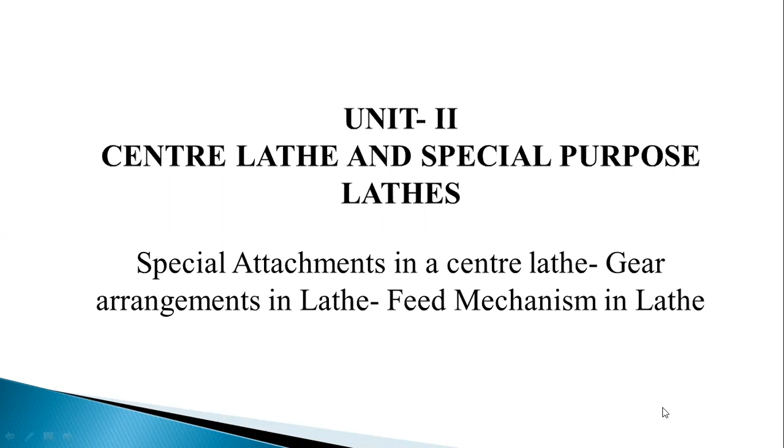Unit 2, Center Lathe and Special Purpose Lathes. From this Unit 2, we are going to see about the topics special attachments in a center lathe, gear arrangements in lathe, and feed mechanism in lathe. We are going to see about these three topics.

The course outcome of the unit is to interpret the construction and working principle of turning machine. From this unit, the students can able to explain the construction and working principles of turning machine, and understand the principles and constructions of the different types of turning machines, etc.

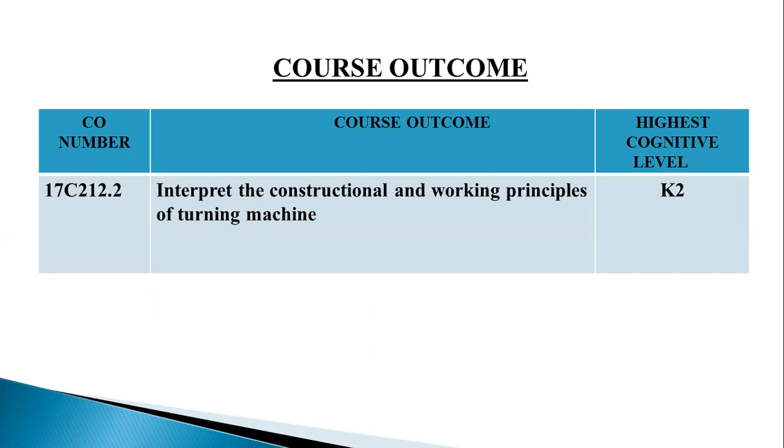Special attachments in center lathe. Each general purpose conventional machine tool is designed and used for a set of specific machining work on jobs of a limited range of shape and size. But often some unusual work also needs to be done in a specific machine tool. Example: milling in lathe, tapping in drilling machine, gear teeth cutting in shaping machines, etc. Under such conditions, special devices or systems are additionally used, being mounted in ordinary machine tools.

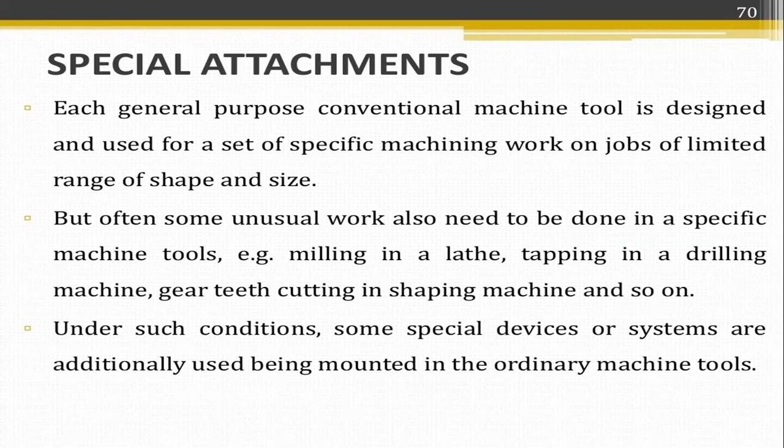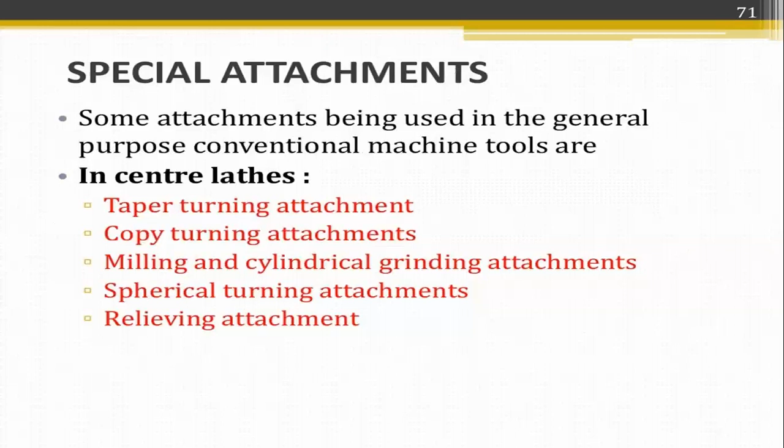Special attachments being used in general purpose conventional machine tools, in center lathe, we are using these 5 types. First one is taper turning attachment. Second one is copy turning attachment. Third one is milling and cylindrical grinding attachment. Fourth one is spherical turning attachment. And the fifth one is relieving attachment.

Taper turning attachment. It consists of guide bar, guide block, bracket for the adjustment of the head and the lathe bed, etc. Here is a taper turning process. In this area, we will be having the attachment. The tool is fixed, and the workpiece will be cut in a taper turning position.

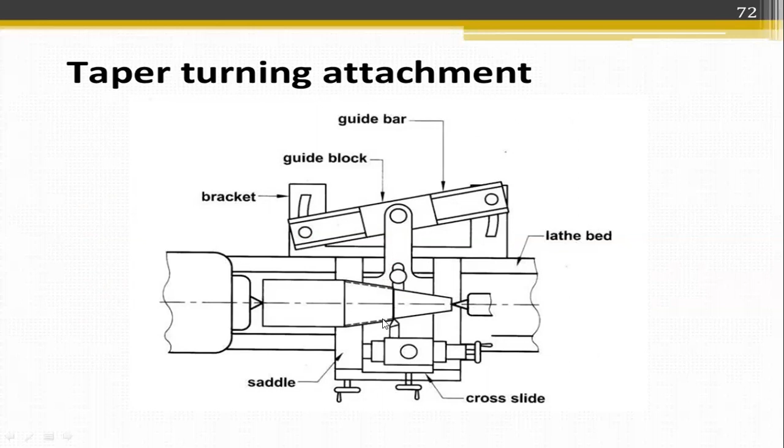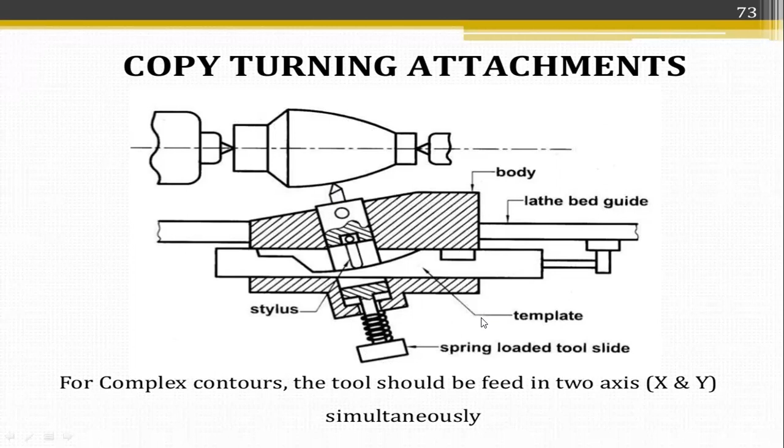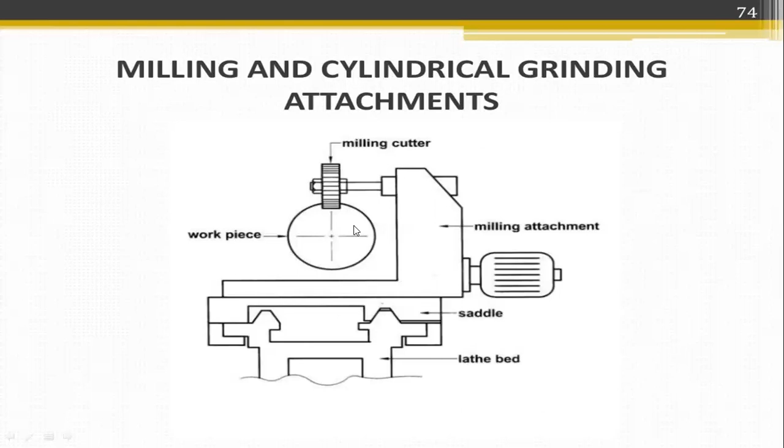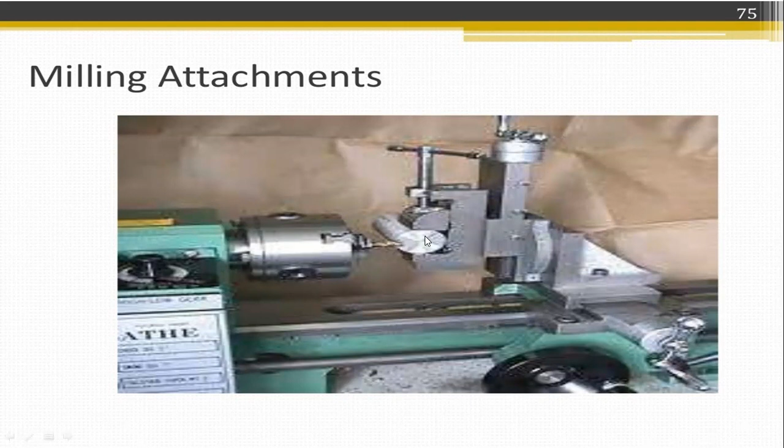Milling and cylindrical grinding attachments. In a lathe, if we need a milling operation, we will be fixing a milling cutter on the head, and we will be having the workpiece here to be cut, and the operation will be finished.

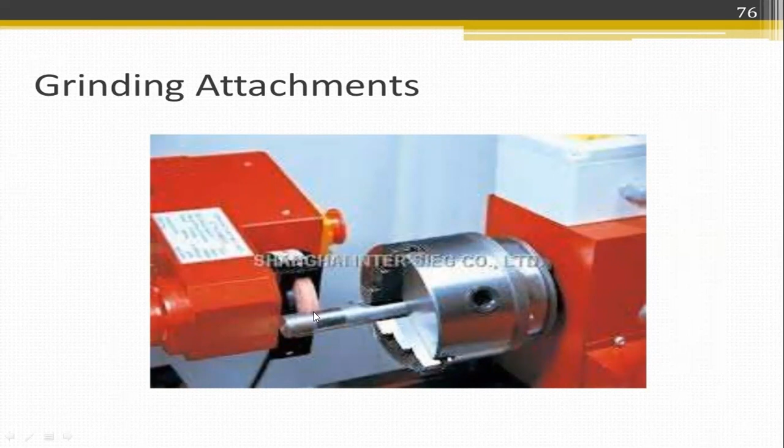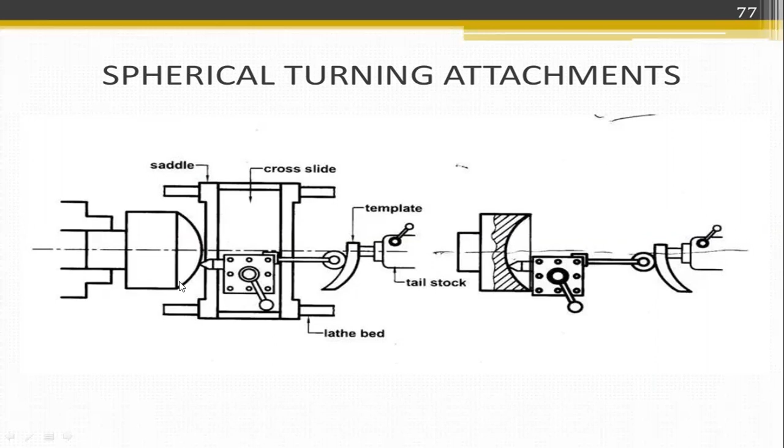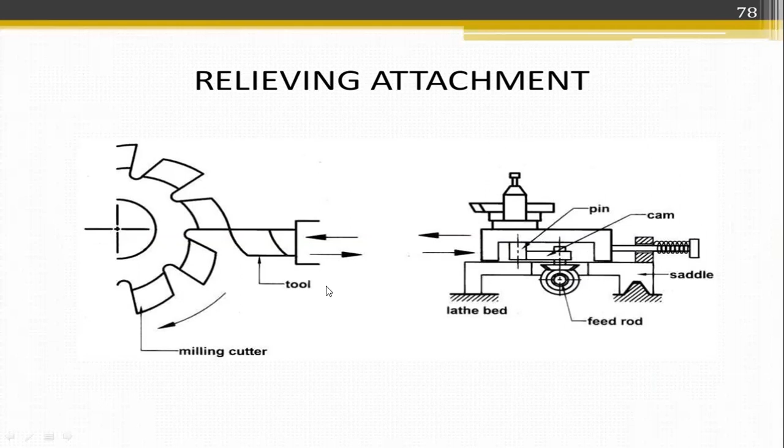The spherical turning attachment: if we need a spherical shape in the head, we will be using a spherical turning attachment in a lathe. And the relieving attachment, used in a milling cutter, will be having a feed rod, saddle, and in the lathe we will be having a pin cam, etc. At that time we will be using a relieving attachment.

Thread pitch correcting attachment. In the thread cutting operation, we will be having a special attachment called the thread pitch correcting attachment. Here the tool and the workpiece are set up for the thread cutting operation, for which we use the thread pitch correcting attachment.

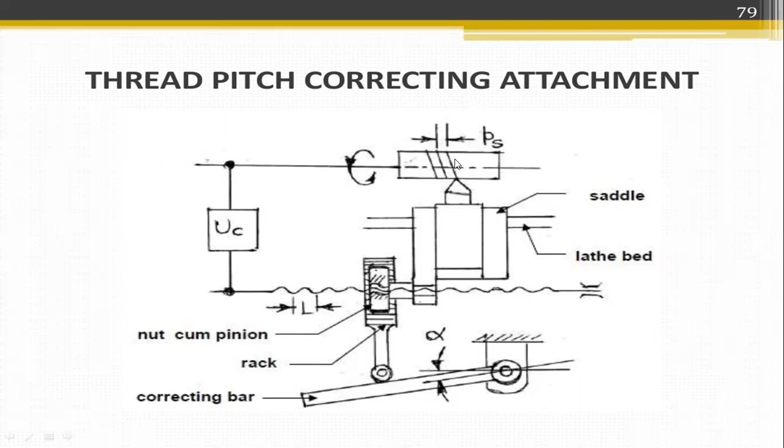Gear arrangement in lathe. There are mainly 2 types of gear arrangements needed in the headstock of the lathe machine. First one is all geared headstock. Second one is back geared headstock.

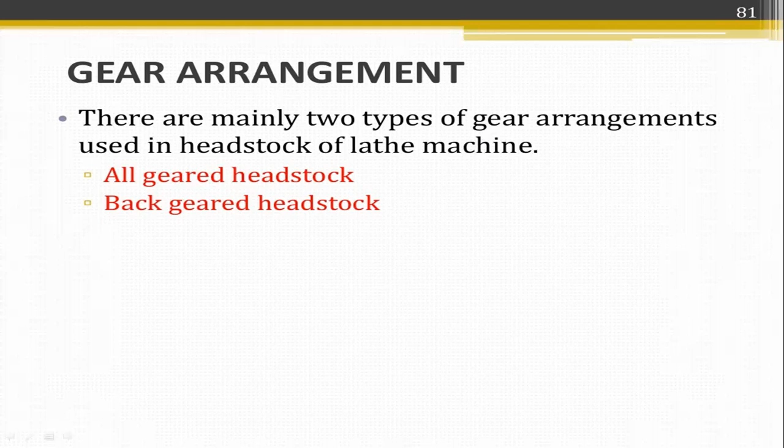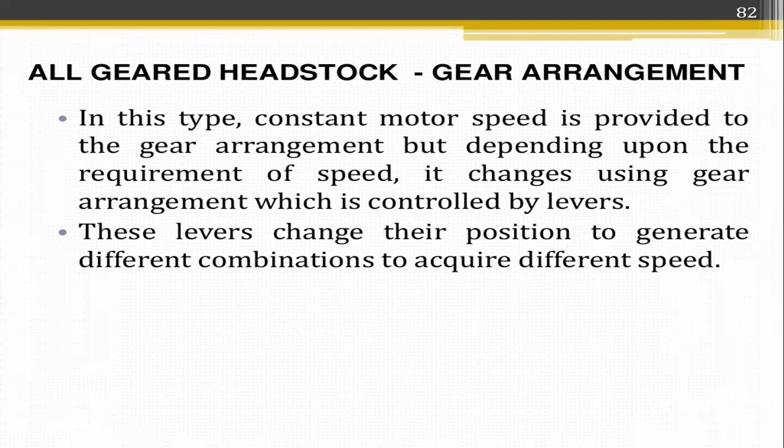All geared headstock: in this type, a constant motor speed is provided to the gear arrangement, but depending upon the required speed, it changes using the gear arrangement, which is controlled by levers. These levers change their position to generate different combinations to produce different speeds. Here is a figure of the all geared headstock.

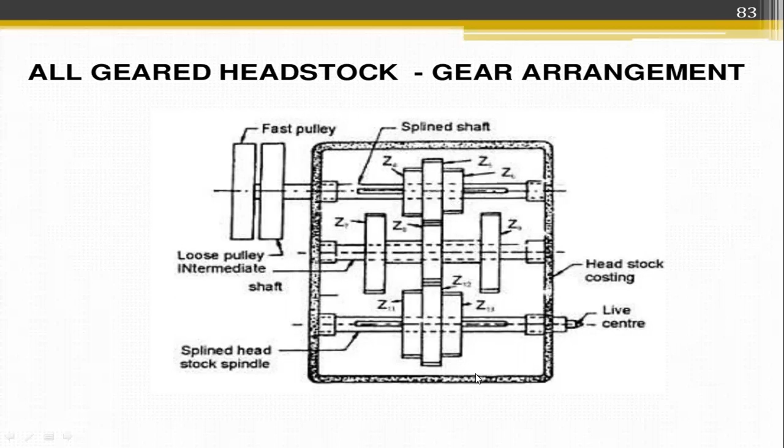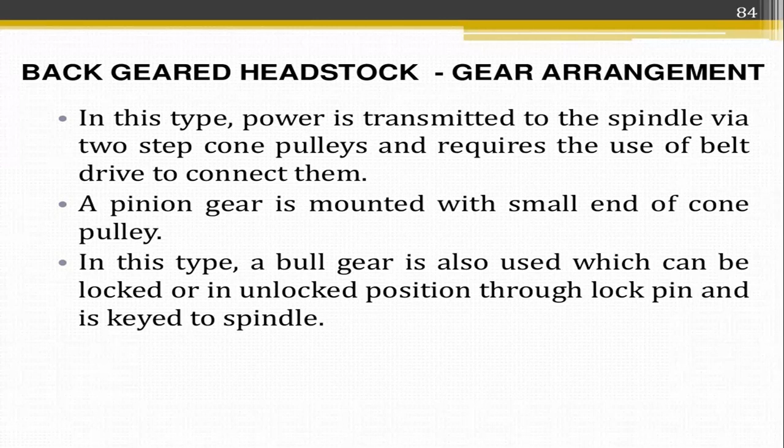Back gear headstock. In this type, the power is transmitted to the spindle via two-step cone pulleys and requires the use of belt drive to connect them. A pinion gear is mounted with a small end of cone pulley. In this type, a bull gear is also used, which can be locked or unlocked through a lock pin and is keyed to the spindle.

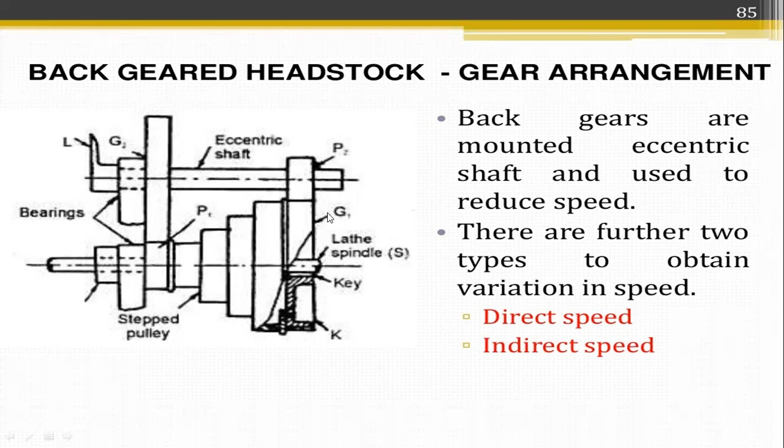Therefore, there are further two types of obtained variation speed: direct speed and indirect speed.

Feed mechanism in lathe, gear arrangement. There are a number of feed mechanisms used in lathe machines, each having a unique function. The feed mechanism comprises of reverse mechanism, change gear quadrant, quick change gearbox, lead screw and feed rod, and apron. These are the mechanisms used here.

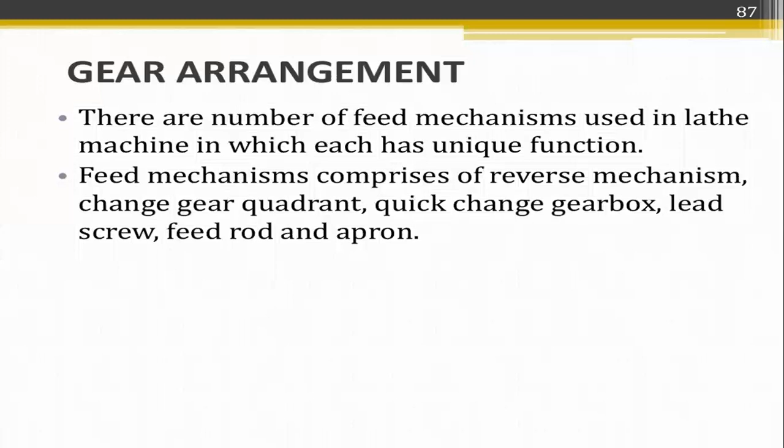Reverse mechanism: the reverse mechanism is used to change the direction of the carriage either from headstock to tailstock or tailstock to headstock. The change gear quadrant with quick change gearbox is used to provide us different feed rates to the lead screw and feed rod.

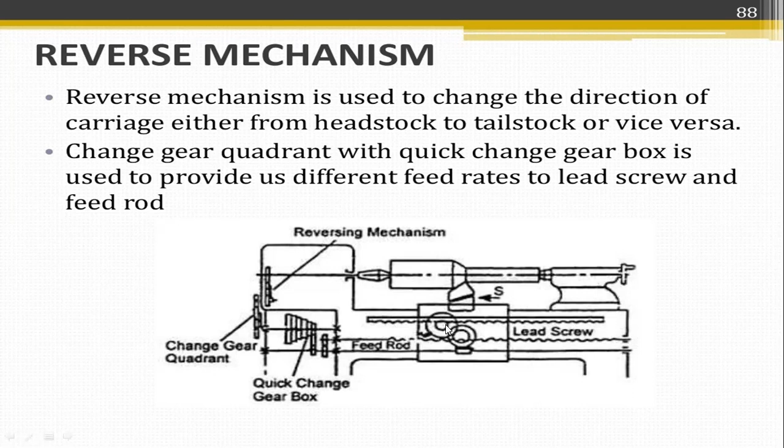This is a feed rod reversing mechanism. The reversing mechanism is used to change the direction from the headstock to tailstock or vice versa. It is a reverse mechanism.

The tumbler gear mechanism: the sole purpose of using the tumbler mechanism is to reverse the direction of the lead screw and feed rod automatically. Here the lever is fixed.

It consists of the spindle gear, tumbler gears, stud gear, intermediate gear, and the lead screw gear. When the tumbler gears change position, it will take a reversing mechanism action, changing from forward to the reverse position.

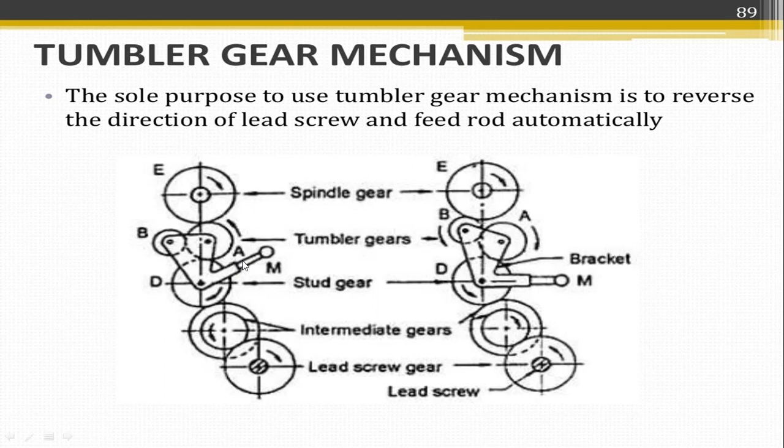When it moves to the reverse gear, it will move to the reverse mechanism. The lever is used to change the position.

Tumbler: the construction of the tumbler mechanism. Gear E is attached to the spindle, known as the spindle gear. The purpose of this gear is to rotate the feed rod and lead screw in a clockwise direction.

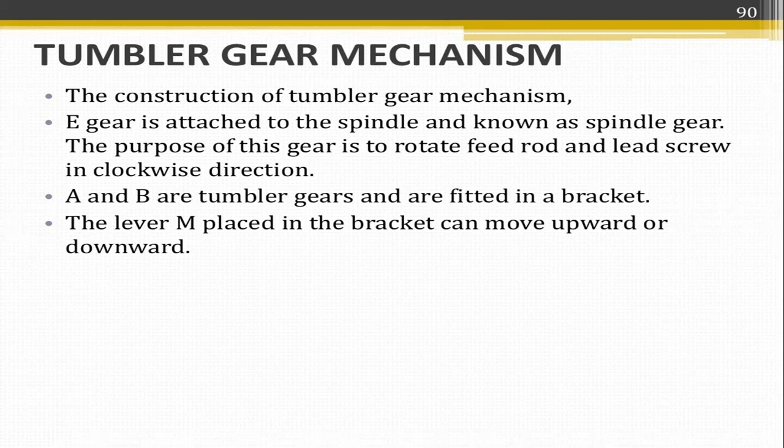A and B are the tumbler gears fitted in a bracket. The lever M, placed in the bracket, can move upward or downward.

In position 1, the lever M is in an upward position and gear A connects with the stud gear D and the spindle gear E. This arrangement will move the carriage towards the headstock.

On the other hand, in position 2, the lever will be in a horizontal position. Gear E will be connected with gear B, then B to A to D. This is the explanation for the figure of the tumbler gear mechanism.

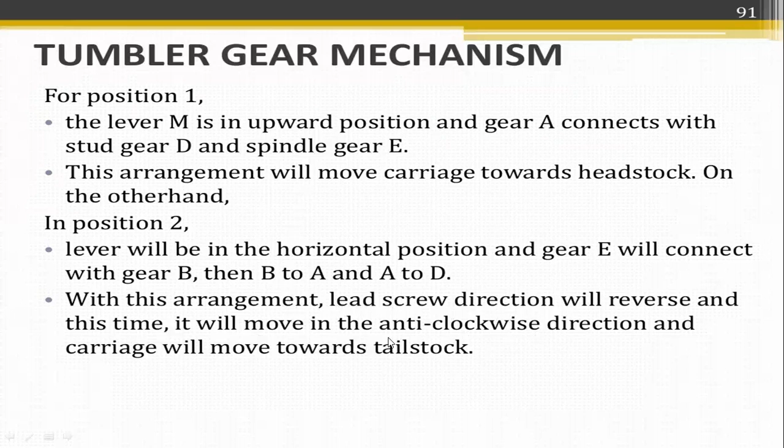With this arrangement, the lead screw direction will reverse, and this time it will move in an anti-clockwise direction, and the carriage will move towards the tailstock.

Quick change gearbox mechanism: in the quick change gearbox, the motion is transmitted from the spindle to shaft A through the tumbler gear and the change gears. On the other side of shaft A, the 12 cone gears can provide 12 different speeds according to the gear lever.

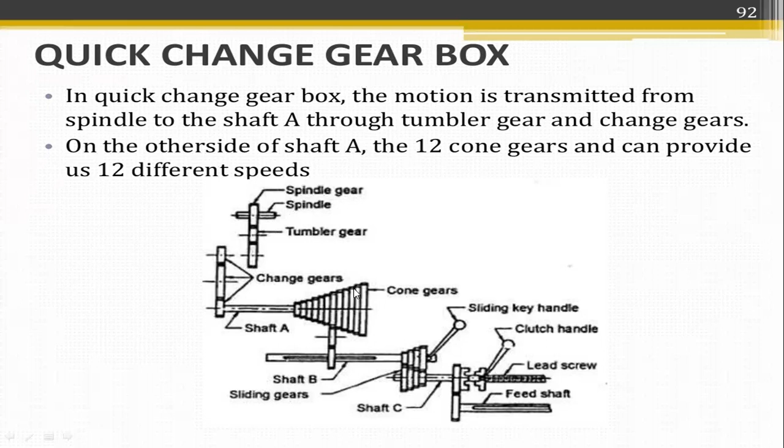The spindle gear and tumbler gear are here, and the change gear mechanism is here. When the gear travels from 1 to the 12th cone, the speed will be different. It is a quick change gear mechanism with a cone gear from 1 to 3 to 12, changing at different speeds.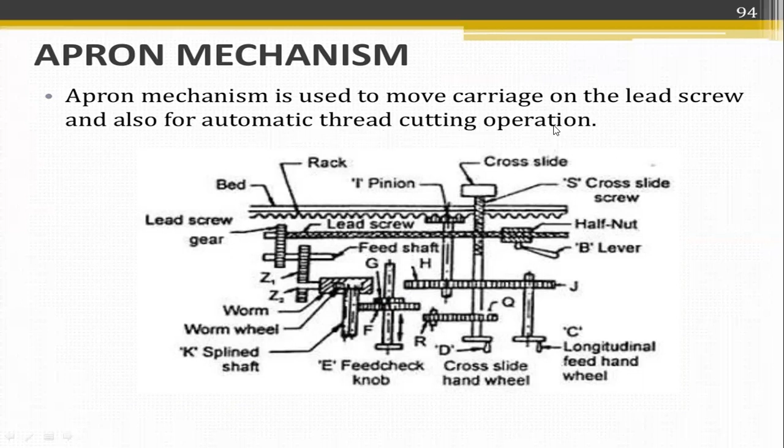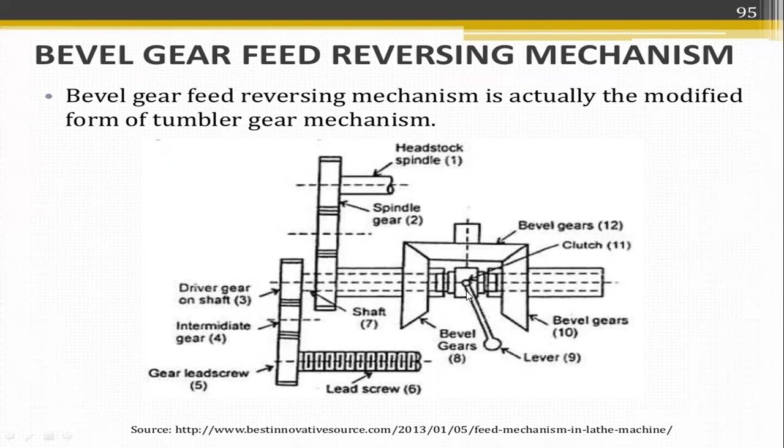Bevel gear feed reversing mechanism: the bevel gear feed reversing mechanism is actually a modified form of the tumbler gear mechanism. It performs the same operation but is a modified version, consisting of bevel gears and clutches inside, like a differential unit.